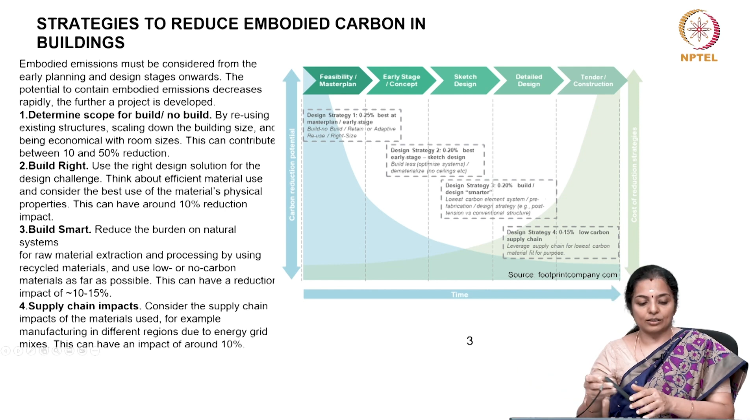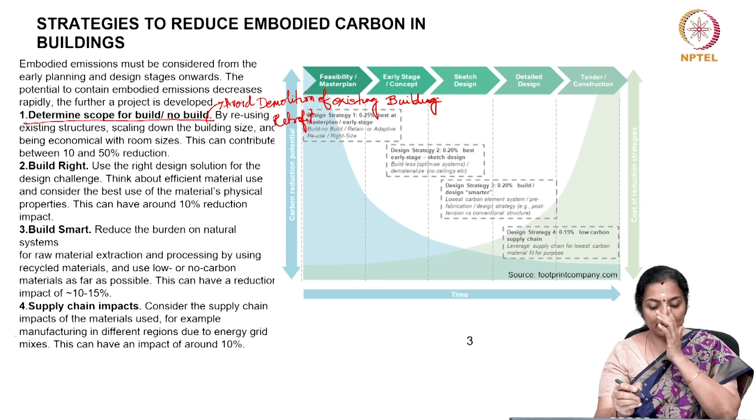The second aspect is you need to build right. So, first is to determine the scope for building, not building, maybe avoid demolition of existing building, and also retrofit of existing building. So, this is the first one. The second is to build right.

Now, we must deliberate and get into the right design solution for that particular design challenge. Now, think about efficient material use and consider the best use of the material's properties. What I mean to say is, if for that particular problem the solution lies in a material which has less embodied emissions, we must be able to advise the client to go for the alternate building material or alternate construction technology rather than pumping in more of the material.

For example, if M20 concrete is sufficient, then we must advise the client that there is no need to go for a higher concrete strength, because it would mean higher embodied emissions. Just this decision can have an impact of 10% on the emission reduction. But again, this must be implemented at an early design stage.

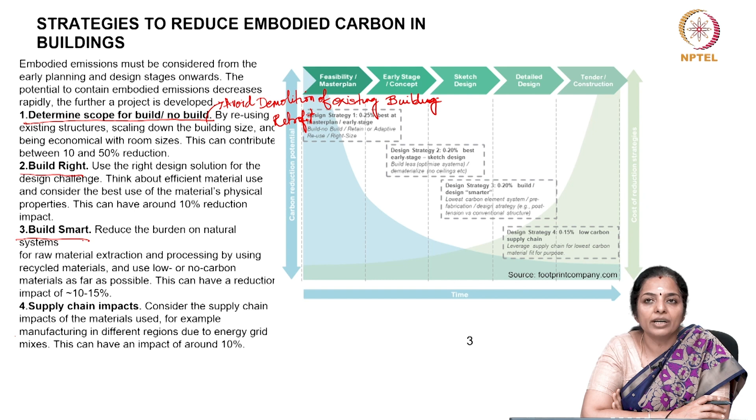Third is, we need to build smart. By saying that we need to build smart, I mean that we need to reduce the burden on the natural systems for raw material extraction and processing. So, how do we build smart? It is not necessary that for every component of the building we have to indulge in new components only.

Recycled products offer a humongous amount of reduction in embodied carbon, because that particular material or component has already been used elsewhere, and all that is involved in the embodied emission of using that material is in transportation and erection. There are many examples of how we can use recycled materials, whether it is in the form of salvaged doors, windows, sometimes vintage doors, windows, cupboards, and so on.

But imagine if you are able to salvage an entire component, like using recycled shipping containers. You must be aware that shipping containers come in modules of 20 feet or 40 feet. So imagine a shipping container being used as a room. And what is the embodied emission of the original shipping container? It's humongous, because a shipping container is made up of one of the finest qualities of steel, and steel is a very high embodied energy material.

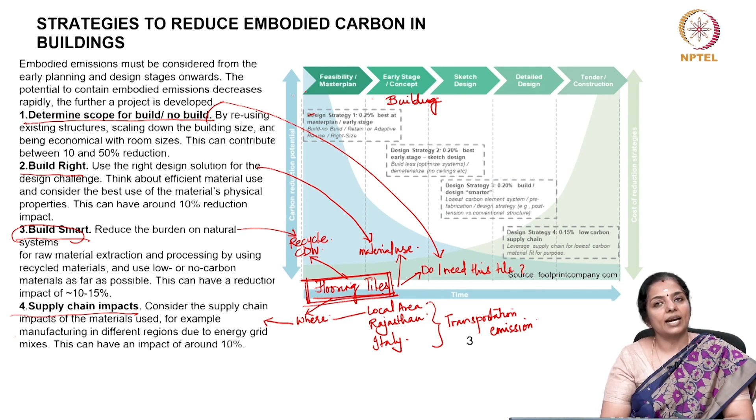So, with just one example of flooring tile, you can imagine how much embodied emissions we can reduce with the appropriate choice. But again, all this has to happen at an early design stage.

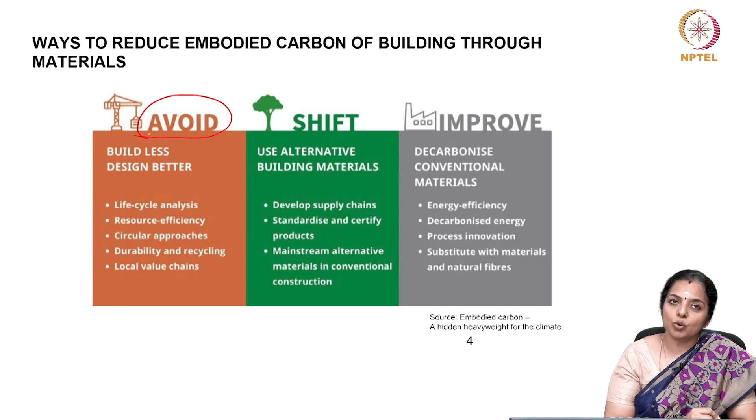Then, what are the ways to reduce embodied carbon of a building through materials? The first one is, we need to avoid. When I say avoid, we need to build less. Please question the brief. It's very important to question the brief. Do I need this? Does the client need this? Or can I advise the client? You could advise the client to build less.

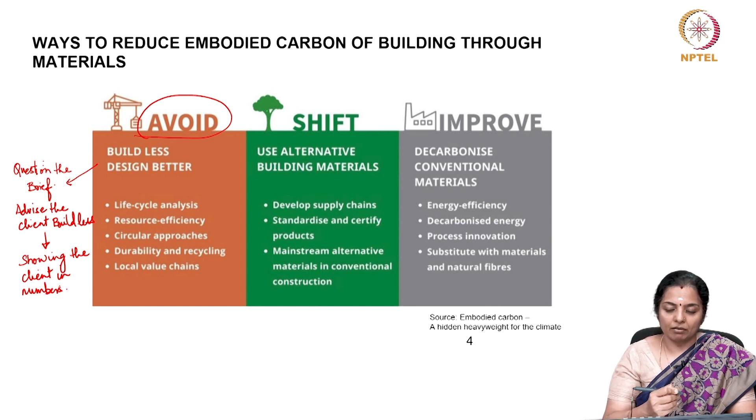And how do you do that? Or what is the way to convince the client? The way to convince the client is by showing the client in numbers the impact his decision has on whatever he takes, whether it is to build less or not build at all or just go for retrofit.

Then second is use of alternate building materials. We need to have a major shift in our thinking by going into use of alternate building materials which have less embodied emissions. So, this could be in the form of using either recycled products completely as products or recycled components, or it could be in the form of recycled building materials in that component. Also trying to go local.

Then the next one is to improve. So, the ways to improve would be to decarbonize conventional materials by having appropriate choices. Appropriate building material choices. I would like to reiterate here again and again that building material choices are very important, and you have various types of building materials, but that is for another day or another course itself completely.

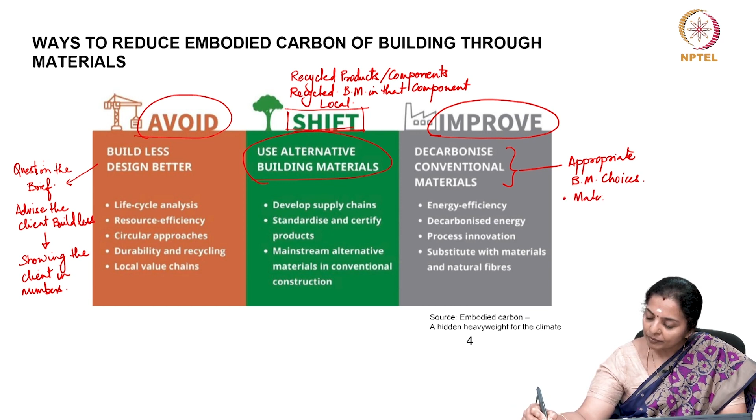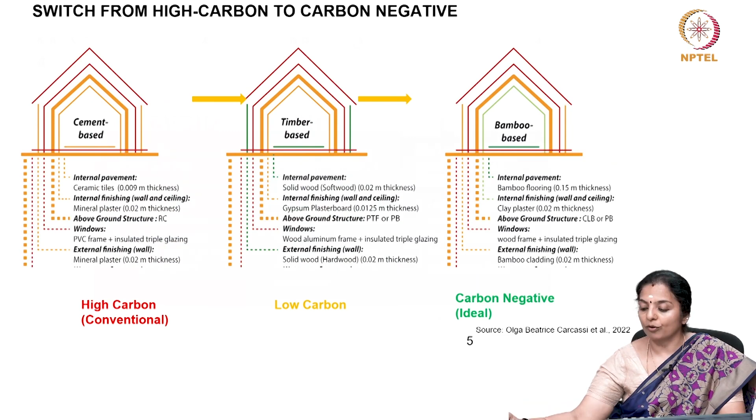So, appropriate building material choices in the form of the actual material, in the form of source of the material, whether it is local or whether it is from some other region of the country or it is from some other region of the world. So, the transportation energy also increases, and also the construction technology, which we rarely talk of. So, the construction technology is another important component. So, a little brief on this will come in the following classes, but a lot more on this will end up in another course itself. So, we need to take care of all of these.

So, to reduce the carbon footprint of building materials and construction, we need swift action to reduce the carbon footprint of conventional building materials while increasing the market share of bio-based or agro-based building materials. There is no either this or that approach. Both approaches are necessary. Concrete, steel, glass, aluminum, plastics and other modern, or now I would even say conventional building materials, considering the scale at which we are using it, these still dominate the current models of construction. So, with these materials, there is no way around addressing emission issues, but we should definitely consider more humane ways of handling the nature by our decisions of appropriate building material choices.